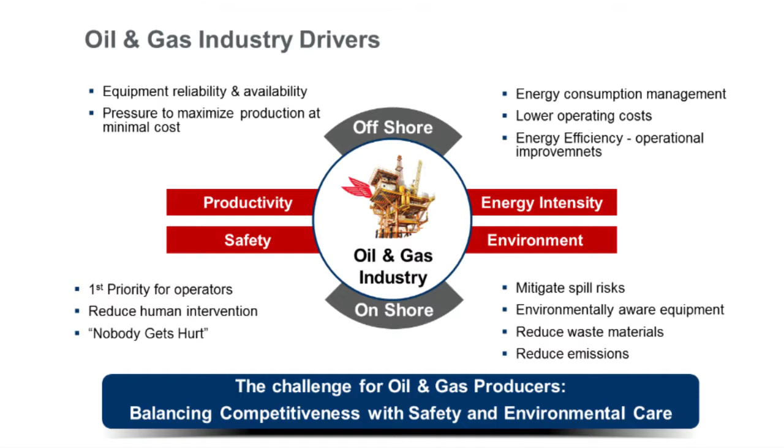So these are the things I think you're working 24/7 to achieve within your jobs, and this is what we're trying to focus on as people developing leading edge technology to help you achieve these jobs. So I won't go through all of these bit by bit, but it's things like equipment reliability and availability, energy consumption and energy management and waste, and obviously the health and safety side of things - nobody gets hurt, reducing human intervention into equipment, disposal of lubricants, etc.

So that's quite a big ask - how can lubricants actually affect that? As I say, 10 years ago, I think lubricants would not have been able to touch a lot of those key elements. But with the development of lubricants within Mobil and the focus we've really brought to the industry, I think we're able to address a lot of those issues and work with our customers to address them. So let's think about lubricants a little bit.

How can lubricants support those drivers that I've just spoken about? Productivity - that's key, that's what we're all in business for. We're all actually in business to make money, and we try to improve our productivity to make our businesses more competitive in the world today. So what we need is enhanced reliability and availability, reduced maintenance cost, and increased return on capital.

Lubricants, and I hope after this morning you appreciate that lubricants - we'll show you examples where lubricants have helped to increase productivity.

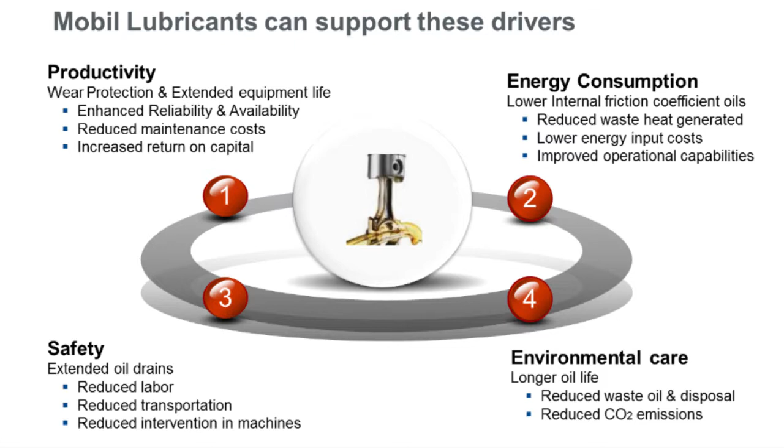Energy consumption. A few years ago, lubricant technology wasn't addressing this issue. Now within Mobil, over the last few years, we've introduced products with proven energy efficiency benefits. Lower friction means reduced costs, reduced CO2, and reduced energy waste. So energy consumption is another key area where lubricants can play a vital part.

Safety: extended oil drains, but also reduced human intervention into equipment. If you've got a lubricant that requires changing less, you have fewer people doing that job, less stoppage of your equipment, and less working at heights — a lot of inherent safety benefits. That's what the advanced Mobil SHC technology can bring. And then, environmental care: reduced CO2, reduced oil waste, and so on.

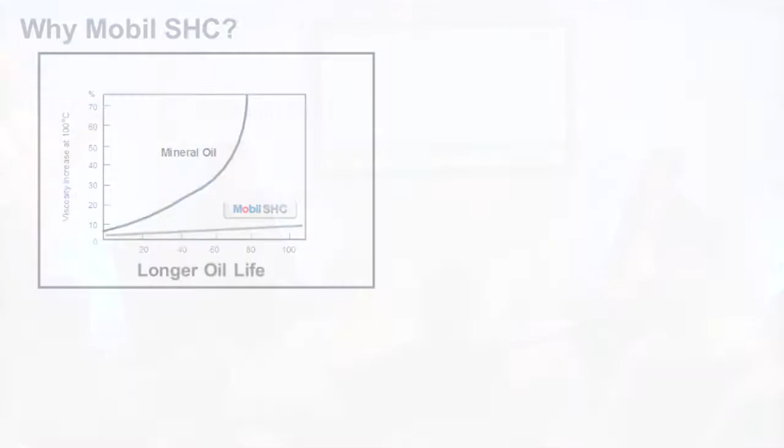So we've covered the drivers of your industry, and this is how we see Mobil lubricants impacting those drivers. This brings us to Mobil SHC, our top line range of Mobil industrial products — what we call problem-solving products, really the key high technology products. This slide talks about some of the key physical and chemical properties of Mobil SHC, which helps address those drivers of the industry.

So, longer oil life, for example. This graph shows a typical mineral oil, the conventional type of lubricant you're probably using in a lot of your equipment, and it addresses the viscosity increase of mineral oil versus Mobil SHC over oil life. Mineral oils actually degrade exponentially over time, whereas Mobil SHC, on the bottom there, lasts typically between 3 and 6 times longer than a typical mineral oil.

So these are some of the benefits: higher productivity, improved safety, and so on. The next one is quite important, particularly in this environment — it's a beautiful day outside, but as we know, it's not always nice in Aberdeen. You get some pretty severe temperature ranges, and the Mobil SHC products have the ability to work in extreme temperatures, both low and high.

What you want from an oil is, at low temperatures, for it to remain fluid so that at startup or during operation it can reach the parts of the machine that need lubrication. But at high temperatures, oils tend to drop in viscosity — all oils reduce viscosity as they get warmer — so you need an oil that, at high temperatures, maintains its viscosity and maintains the oil film thickness.

There's a parameter called viscosity index, and the Mobil SHC synthetic products have a very high viscosity index, giving you protection at both ends of the spectrum — cold temperature startup protection, but also fewer high temperature trips in your equipment, which can happen and cause a lot of downtime.

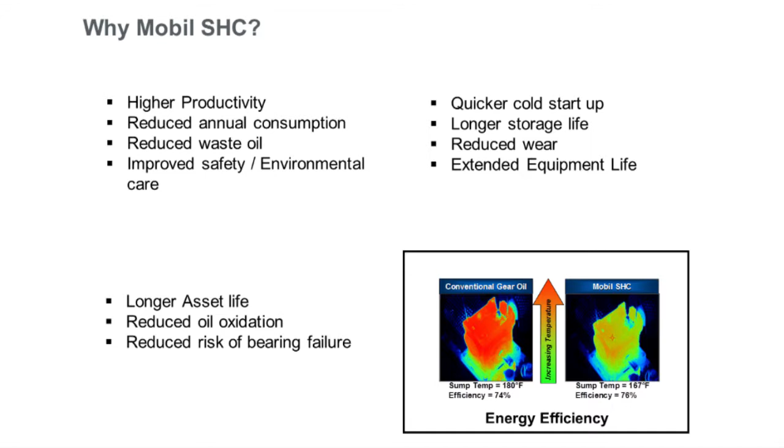Wear protection is fundamental — obviously you're not going to get reliability, and you're not going to help your productivity if you've got a lot of wear happening. So none of these properties compromise the extremely good performance of Mobil SHC in wear protection versus other products like conventional oils and cylinder oils.

And I like this final one — it's very new and a great indication of how technologies develop. This is about energy efficiency: an infrared picture of a gearbox, one with mineral oil, one with Mobil SHC. You can see the equipment running hotter — 13 degrees Fahrenheit hotter with the conventional product. That has an energy efficiency benefit, an oil aging benefit, and gives you up to, with some products 3%, some products 6% benefits in terms of energy efficiency. A few years ago, nobody would have been able to talk about that — it's a really new development within Mobil SHC.

So the question is, that's the theory, that's the products. How are we applying that in the oil and gas industry? Where are those products being used? And what are some of the key elements?

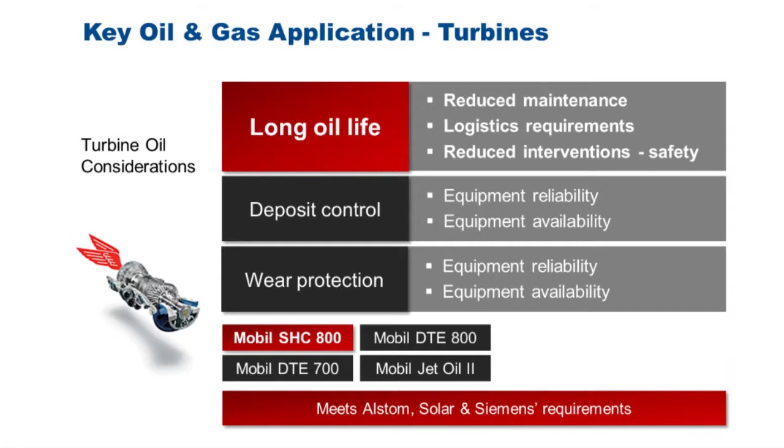So again, what are you looking for from your turbine oil? Long oil life, deposit control, wear protection, etc. That's the range of products we have, like Mobil SHC 800. We also have mineral products, DTE 700, DTE 800. We've recently introduced a new product called DTE 932, specifically designed to address varnishing within gas turbines, which is becoming more of a question mark in the industry at the moment. So turbine oils are one of the key areas to consider.

I said earlier we have some examples from industry, from our customers, of where they've used these products. For this one we've actually got a video to follow my short presentation, so I won't talk too much about it. This next one, Mobil SHC 824, was an interesting case in the oil and gas industry—a refinery in Italy that was having a lot of trips and downtime because of deposits in the servo valves of the system.

They moved to Mobil SHC 824, a synthetic turbine oil, and since then, working with our engineers to effect a good transition to the new product, they haven't experienced any trips or downtime like they used to. So the deposit issue within their system has been solved. That's a saving of somewhere in the region of 230,000 euros—a quite significant saving in terms of what they were experiencing in downtime. So that's a good example.

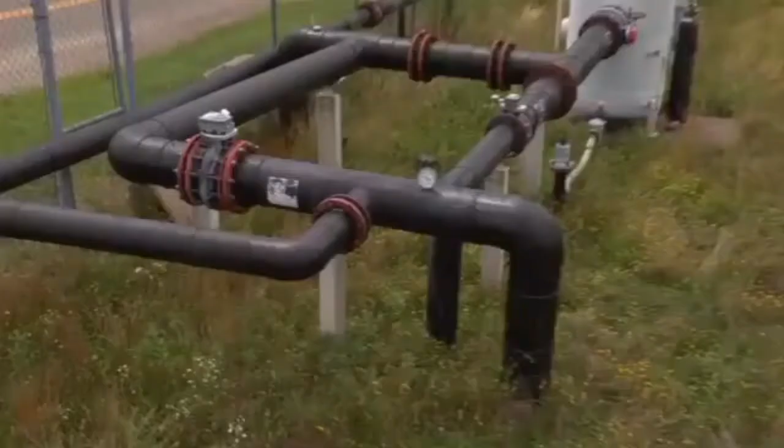Hello, I'm Travis Lale, a proud member of the team behind Mobil Industrial Lubricants. Every day we hear success stories about customers who rely on our flagship Mobil SHC synthetic lubricants. That's because they're formulated with advanced technology to help meet or exceed our customers' most demanding needs.

Today I'm here in Tinton Falls, New Jersey, and I have the pleasure of sharing with you another of our Mobil SHC success stories.

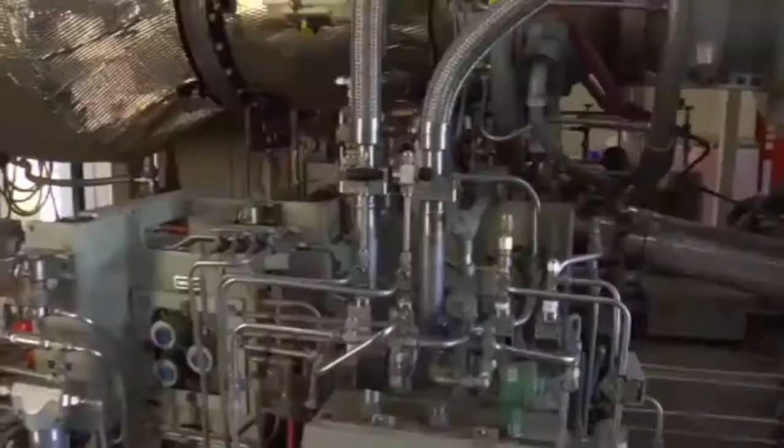Here at Monmouth Energy, they take methane gas and turn it into a reliable source of electricity for local businesses, schools, hospitals, airports, and the like. Monmouth Energy has exceeded 90,000 hours using Mobil SHC 824 in their Solar gas turbine. Now clearly that's something that we're proud of, so let's go inside and take a look at their operations.

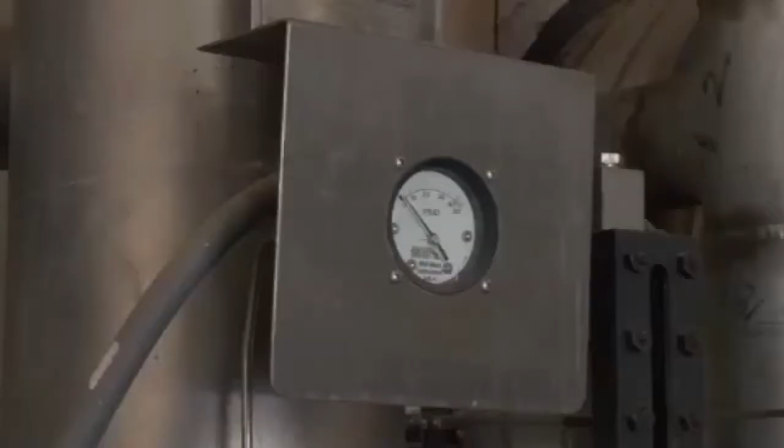The power that we produce here is actually sent onto the power grid and is distributed throughout anywhere within the Northeast to supply approximately 12,000 to 15,000 homes.

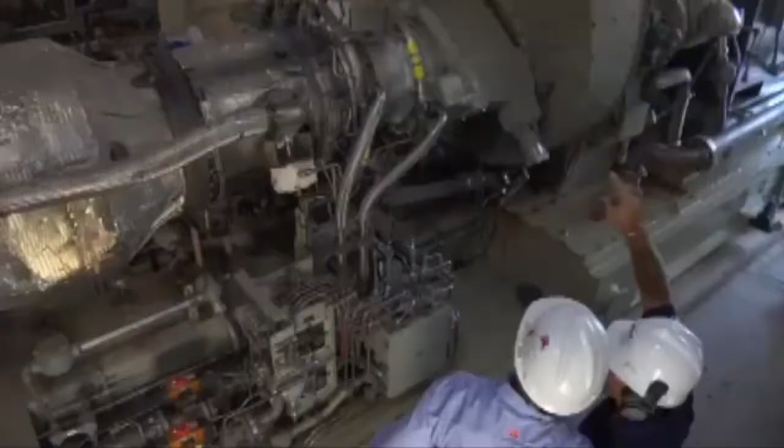What we do here is we extract landfill gas and direct it through a series of pipes into a processing plant. We do some purification to the gas and send it into a gas turbine that is coupled up to a generator to generate electricity.

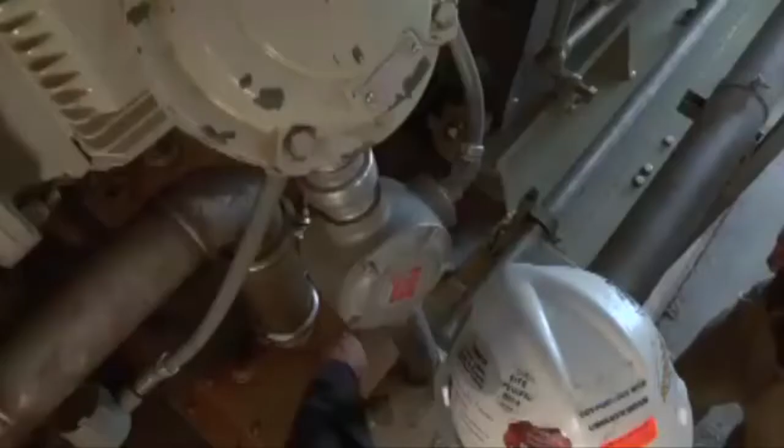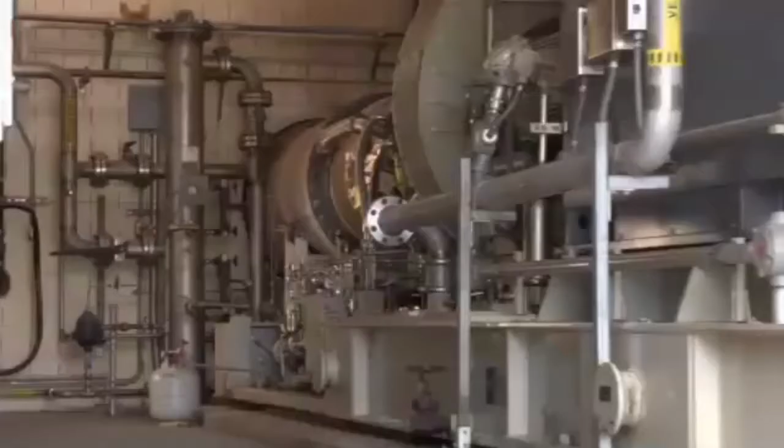We keep up with all the preventative maintenance that the manufacturer suggests with filter change outs and such. We're coming up on a big milestone here. One of our turbines is coming up on 90,000 operating hours, still with the same original charge of oil that was put in when the units were first installed approximately 13 years ago.

But the biggest factor, I believe, is using a very high quality lubricant such as the Mobil SHC 824. Based on the latest results we've gotten, the oil has shown no significant breakdowns at all, and we look forward to using this oil for some time to come.

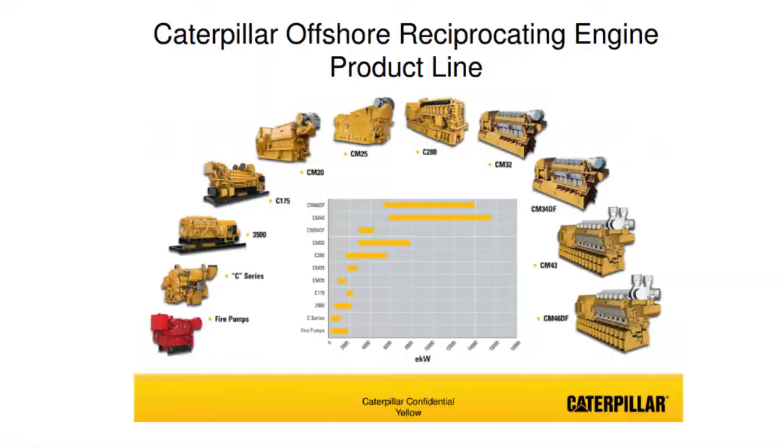So before we start, I just want to touch base on the complete Caterpillar offshore product line of reciprocating engines. We have products anywhere from 20 kilowatts up to 15 megawatts and growing on the reciprocating engine line. Towards the left-hand side of the screen here, these engines mainly run on distillate fuels. As you move up and towards the right, these engines can burn not only distillate fuels, but heavy fuels and natural gas.

Caterpillar is constantly investing in research and development to improve power density and efficiencies for these products. And then as we're going to discuss today, a lot of that research and development is going into reducing emissions, utilizing natural gas, and providing safety features.

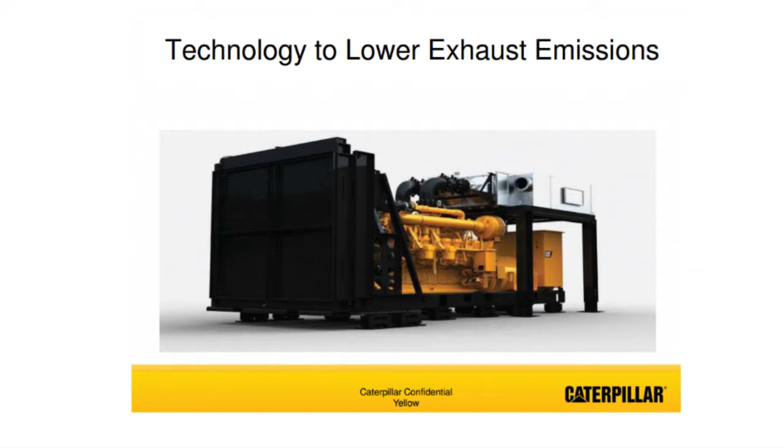The first technology I want to discuss is called selective catalytic reduction, commonly known as SCR. This technology has been around for decades. It was actually patented back in 1957. It's gone through many changes over time. It's commonly used in on-road applications for lorries, trucks and on-highway vehicles, and now it's been used offshore and in other on-land applications. We're going to discuss this technology and walk you through the basic concept in the next few slides.

So how does SCR work? SCR is the process by which oxides of nitrogen, commonly known as NOx, contained in the diesel exhaust, are reduced to nitrogen and water. It goes through a process where diesel exhaust fluid, or DEF, a urea-based substance nowadays, is injected into the exhaust stream using either air-assist technology or airless injection. When it injects into and mixes with the exhaust gas, it then flows through a catalyst. This chemical reaction eliminates the NOx and turns the exhaust stream into nitrogen and water.

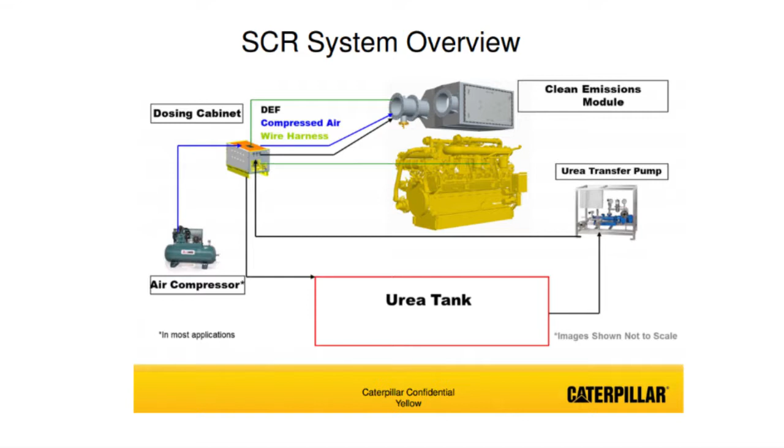But it's rather new to the offshore business, so people are a little bit unfamiliar with it and a little nervous with everything new in the industry. The other thing is this is all off-engine — it's after-treatment. The engine itself stays practically the same; we utilize the same engine that's been proven for durability and reliability. Not a whole lot changes to the engine itself, we just add after-treatment afterwards.

There's no additional equipment required to meet some of the Tier 4 levels in the U.S. and some of the IMO and Euro levels in other parts of the world. So this selective catalytic reduction can be used, especially for offshore, without the need of a diesel oxidation catalyst or diesel particulate filter and some of these other after-treatment systems that require a high level of maintenance and complex controls to function properly.

Here's a general schematic of how the SCR system would be outlined on an offshore vessel or rig. You'd have a urea tank — this is new, you'd need some type of holding tank for the urea system — and you'd transfer that urea, generally using a transfer pump, over to what we'll call a dosing cabinet. This dosing cabinet houses the controls that meter the amount of urea going into the exhaust stream, depending on electronic feedback from the engine to know what load the engine is running at, so it knows how much urea to meter into the system.

It will also receive information back from the exhaust stream after it goes through your clean emissions module to monitor how the emissions are functioning properly, so it can correct itself to make sure emissions levels are maintained. Sometimes air compressors are needed to supply that air assist — this is generally used in much larger engines, so as you get to over a couple megawatts of power, you'll generally have some type of air-assisting mechanism. What that does is break the urea down into a nice fine mist, so the mixture in the exhaust stream gets nicely mixed prior to entering the catalyst.

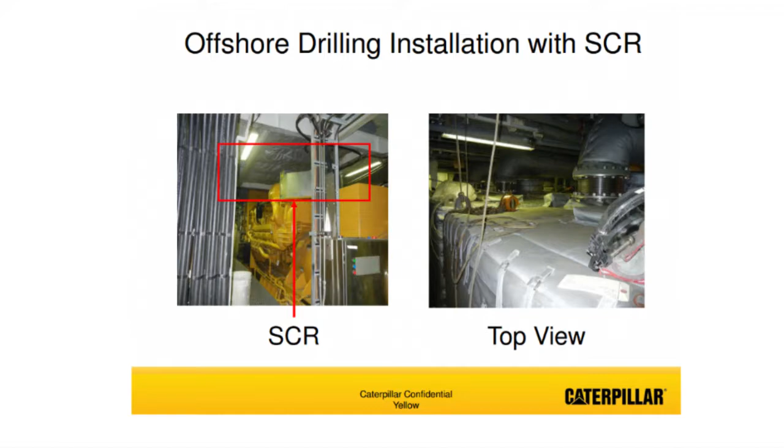We've done some development work within the engine to minimize that module. There's two things you really need to do: minimize the size and minimize the cost of that module, while at the same time providing optimized operational cost to our customers. Again, here's a view of the installation in a rig.

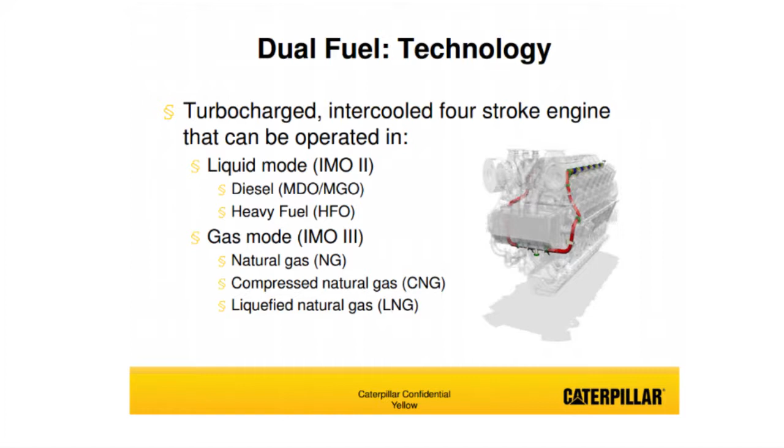From there I'll move to the technology that not only reduces emissions but utilizes natural gas. The name of this technology is dual fuel. Dual fuel is a technology that utilizes natural gas or liquid. So you have a liquid mode, which can burn light fuels or heavy fuels, and a gas mode, which will burn natural gas, compressed gas, CNG or LNG, and it will utilize a liquid pilot, commonly marine diesel oil, to ignite the natural gas. This technology at Caterpillar is generally used in products about 3 megawatts and higher, so the technology I'll describe today pertains to the higher power engines that Caterpillar produces.

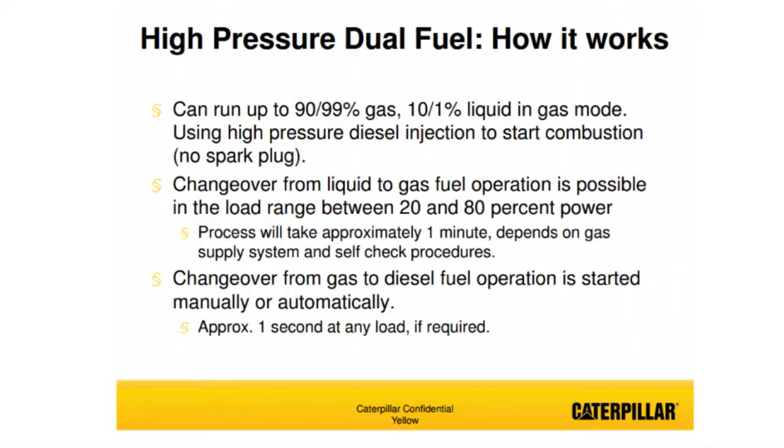So how does dual fuel work? Again, you have a gas mode and a liquid mode. You can run on gas mode from up to about 90% to 99% gas, and that remaining 1% is used for pilot fuel. So when you're running in gas mode, you're generally utilizing between 1 and 10% liquid fuel. The changeover can go from liquid mode to gas mode, and that's generally possible when you're operating your engine at about 20 to 80% load.

So when you're operating at that load, you can then put yourself from liquid mode into gas mode, and that'll take approximately a minute to change over. It does vary sometimes depending on the natural gas flowing into the engine, but in general it takes approximately one minute.

Now, when you're in gas mode and you want to go back to liquid mode, this can be done manually - you can walk up to your operating station and press a button to switch back. Or it can be done automatically: the engine senses there's some issue with the natural gas supply and switches back automatically to liquid mode, and this is done in about a second. So this switchover from gas to liquid mode happens in about a second, and you maintain that power - you never really see any blips in your power output.

Now, what are the advantages of dual fuel? The first advantage is it provides operational flexibility. In general, you can burn a light fuel, a heavy fuel, or natural gas. So depending upon your location of operation, and the cost of fuels at your location, you can utilize these different types of fuels.

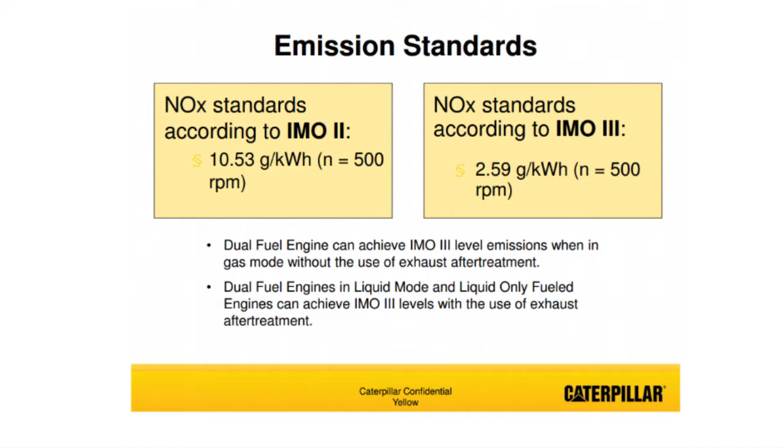So safety is sometimes a concern when you're utilizing natural gas. The engines have been developed according to the international regulations for gas-fueled ships. This is commonly known as the IGF code, and that code is set up to provide safe operation of machinery when utilizing gas as a fuel.

We've built in some safety features. In case of a malfunction of that natural gas system, the engine won't shut down. Instead, the fuel supply will be switched back to the liquid mode. So you've got really two sources of fuel on board that you can utilize to maintain power in your operation.

There's a leakage monitoring system throughout the gas system, so we detect if there's any types of gas leaks in the system, and we'll alarm the operator that there is such a leak so that proper action can be taken. As additional safety, all the components are double walled, so that leak detection is usually in between those two walls of your piping system. Again, it remains contained within the engine.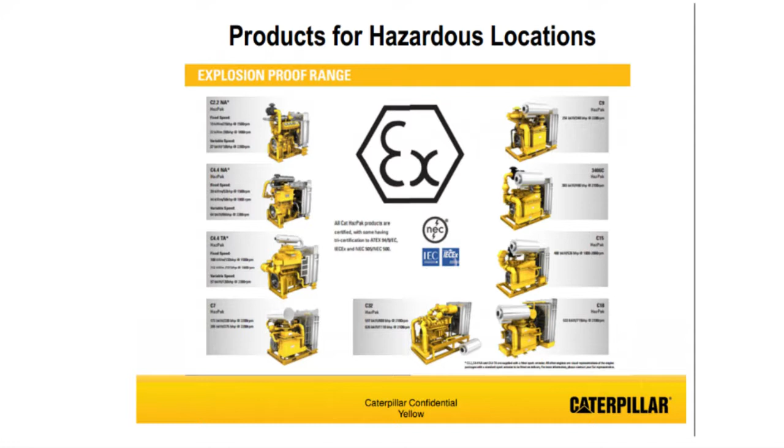So as we move from safety features of the dual fuel engine, we'll transition to products we have that address safety concerns. Caterpillar has a line of standard hazardous location products, anywhere from 20 kilowatts up to about 825 kilowatts of power.

These hazardous location products are complete power units from a radiator through a flywheel, and that can be used to drive whether it's pumps or generators, and we'll show you a few examples of what we've utilized these products for. They'll meet various hazardous location requirements - that could be ATEX or NEC, Class 1, Division 2.

We'll utilize products from our C2.2, so a 2-liter engine, all the way up to a 32-liter engine in this range of products. And we also offer some gas engines that will be certified for Class 1 Division 2 wiring initiatives.

So these standard hazardous location solutions, looking at the smaller end of the product line, the 2 to 4 liter units - this is anywhere from 20 kilowatts to 115 kilowatts of power. This is a complete package that's built and tested at the factory. For this product line, we have ATEX only, not NEC Class 1 Division 2. We also offer varying emissions levels of products that are available in this range as well.

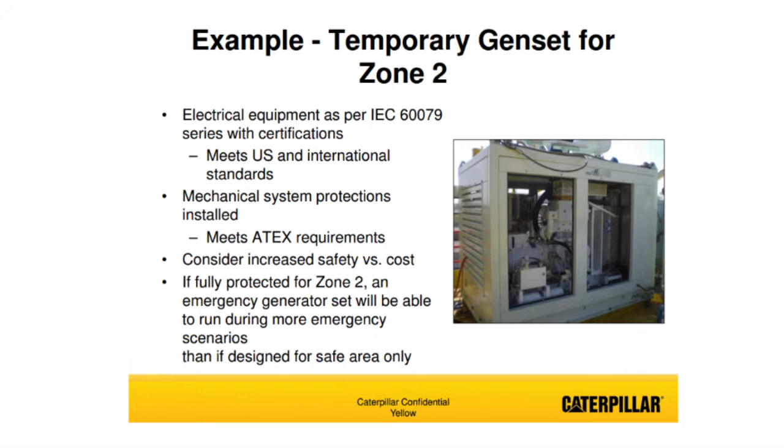Let me move to a couple examples of how these can be utilized offshore. The first example is a temporary generator set for a Zone 2 area on board an offshore installation. This generator set provides electrical power that meets the standards of ATEX or the IEC codes, and the mechanical systems. What this does is it provides you the flexibility that as you need temporary power and you're looking for a place on your installation to put it, you can put this unit in a safe or a non-safe zone, because these are built for non-safe zones. It gives you that flexibility to place this power at various locations on your installation.

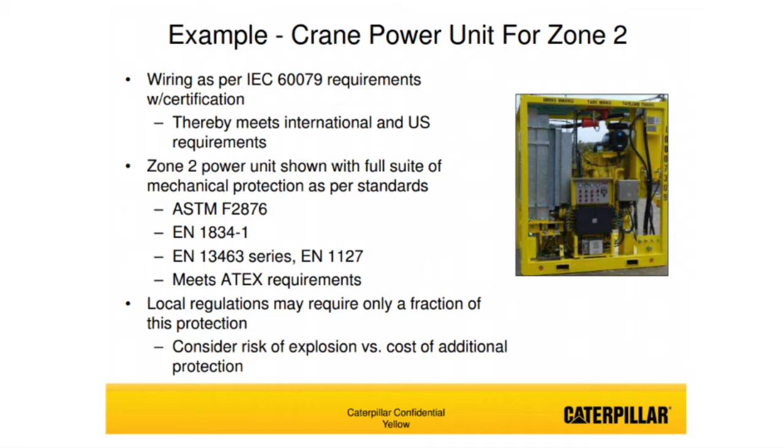The next example would be utilizing this for crane power. Sometimes a crane is right on the boundary between a safe and non-safe zone, so you can utilize this power pack to make sure that you're fully safe. You can see the few standards that these types of installations utilize, and there may be some local regulations that we'll meet, and sometimes local regulations are at a lower level than maybe what this product can meet. So sometimes it's a cost and safety trade-off that operators do have to go through in a process to say that they want to have this type of installation on board.

And then finally, the last example we have is more permanent generator sets for offshore installations - these are units that are usually much larger.

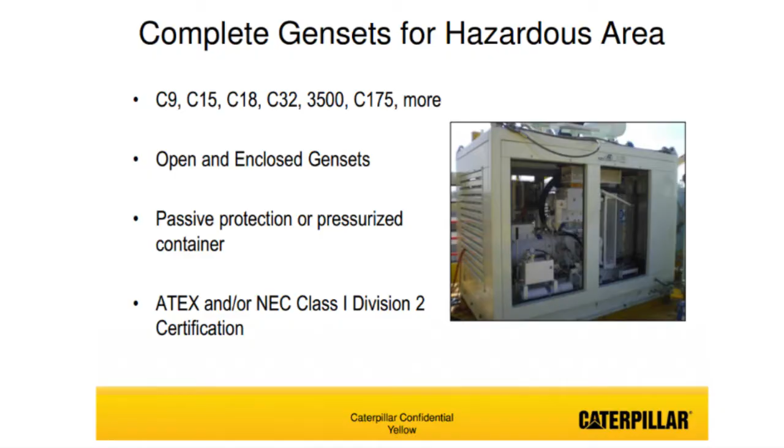They'll go up to 1 or 2 megawatts of power or more, and they'll be at a permanent location on an offshore installation that is in a non-safe area. So we can provide those complete packages. These are open or enclosed, typically on the larger end these are enclosed, so they'll utilize pressurized containers and so forth, but they'll be capable of operating in a non-safe area to meet the ATEX or the Class 1 Division 2 regulations.

So I want to thank you again for the opportunity to speak with you here today, to discuss quickly some things that Caterpillar are working on to address the emissions regulations that are out there, the need to burn natural gas and utilize that as a fuel for your engines, and also the technology and products we're using to address the growing need of safety concerns and to have nice, efficient operations. Thank you.

The Lubricant Company, one of the largest distributors of ExxonMobil lubricants in Europe and the strategic distributor of the Mobil brand for Scotland, the north of England, the Midlands and North Wales.

Our purpose is to deliver real value to our customers through the supply of added value lubricants, lubrication services and lubrication solutions. With our UK headquarters in Scotland, the Lubricant Company are at the heart of the oil and gas industry in Aberdeen, the oil capital of Europe and the centre of expertise and innovation so vital to optimising productivity. With over 50 years' experience and employing a team of around 50 professionals, each year the Lubricant Company purchase, store and deliver some 10 million litres of ExxonMobil lubricants.

With a network of storage, distribution and technical sales centres throughout the whole of the UK, from the Shetland Islands down to Glasgow, the North East, the Midlands and across to the port of Heysham in the North West, and with our facility in Altens, Aberdeen, home to the Lubricant Company's largest lubricants distribution centre in Scotland, we are strategically placed to ensure you have the right product in the right place at the right time, storing millions of litres and covering hundreds of product lines.

The Lubricant Company operate their own modern transport fleet for distribution, understanding from our customers that quick and on-time delivery is essential to the smooth operation and success of their business. But this is only part of the story.

Our aim is to add value to our customers. So we combine ExxonMobil's world-class lubricants with the Lubricant Company's world-class service. With a dedicated team of friendly customer service consultants, the Lubricant Company provide a one-stop shop for all your lubricants, lubricant services and total lubrication management solutions.

We are here for you. It's why we are in business. Working in partnership with you, the customer, our team of specialists are here to provide solutions and ensure that, whether onshore or offshore, we add value to your business.

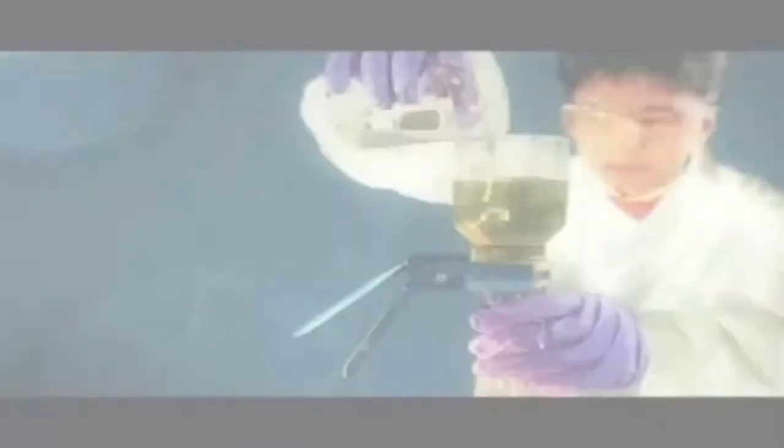The Lubricant Company recognise the full benefits and opportunities that our customers can achieve through the superior performance of ExxonMobil synthetic lubricants. Our field engineering and technical teams understand the impact of uncontrolled downtime and how selecting and delivering the correct lubricant can have a measurable effect and provide greater productivity, greater efficiency and greater profitability.

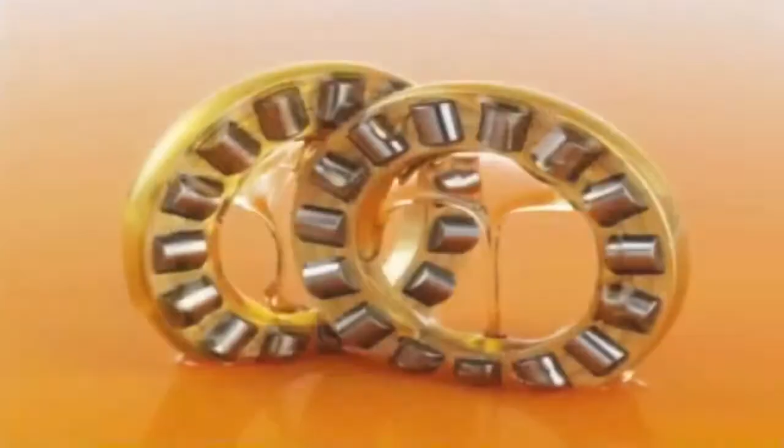The Lubricant Company has ISO 9001 quality accreditation and ISO 14001 environmental accreditation, CHAS accreditation and are FPAL registered. We are also proud to be recognised as an Investors in People organisation.

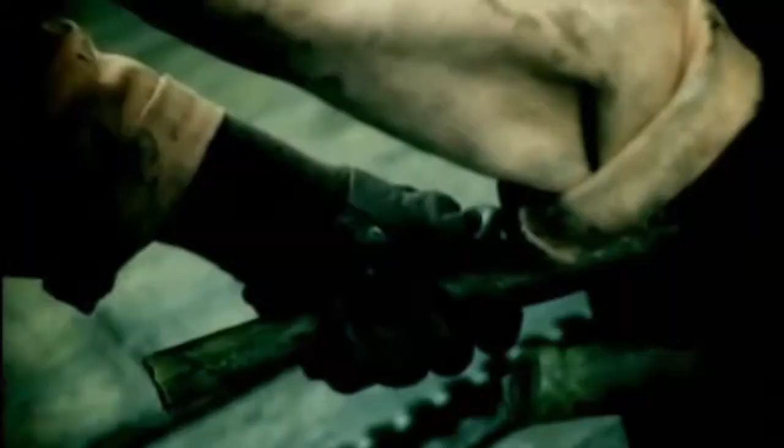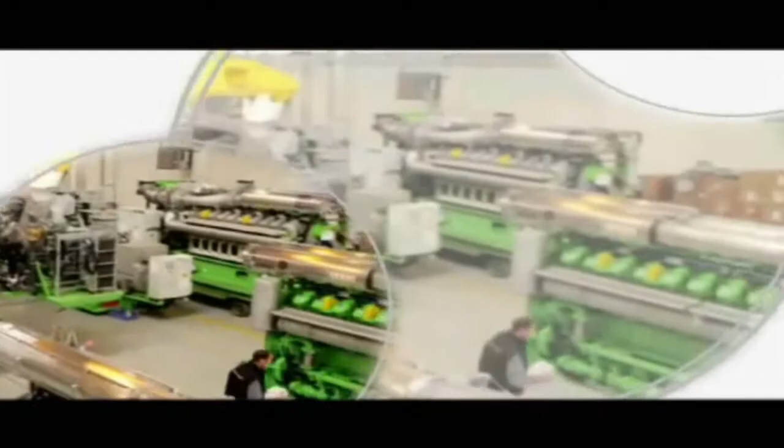By listening to you, the customer, and fully understanding your challenges, needs and safety issues, the Lubricant Company enable you to concentrate on your core business, safe in the knowledge that you're getting the best from your equipment, your employees, and of course, us. It's all part of the service from the Lubricant Company.

Why not take a closer look at what we do? World-class lubricants and a world-class service. TLC, the Lubricant Company. TLC, the local company.

Right, thanks very much for that, Will. I'll come to some questions for you in a moment. But first of all, Peter, I've been noting down some things. You mentioned how lubricants have changed through the years, that you might think they're the same, but actually there have been big advances. How do ExxonMobil actually develop these lubricants?

Oh, that's a good question. It's a very involved process. I think the key thing is to get the feedback from the marketplace in terms of equipment builders, customers, the sales team, in terms of what are the drivers, what are the requirements of the industry. And then we go through a process with our technical people, they work on product development, testing, field testing, and it's quite a long and involved process. But then we have new products, we come through with new products which meet the requirements of the industry. So that's the process we really go through.

So all the way from market through to product development, to field testing, and then to product launch. And obviously events like this where you can meet an awful lot of customers are very important to get that feedback.